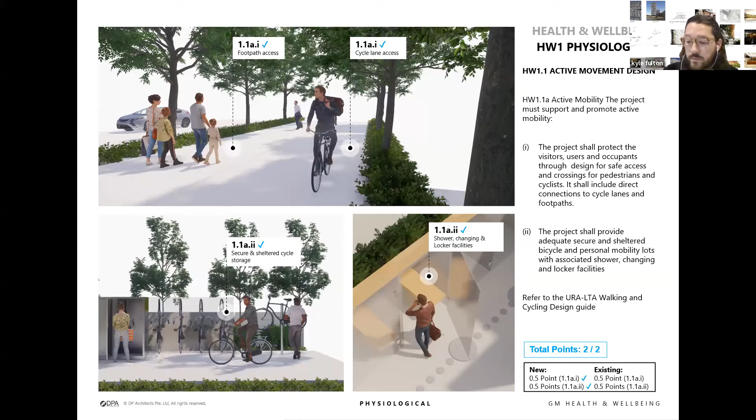The next item is about active interiors. So we come inside the building now, and here, if you provide active staircases rather than using lifts or travelators, this can be really beneficial, and so you get a single point for that.

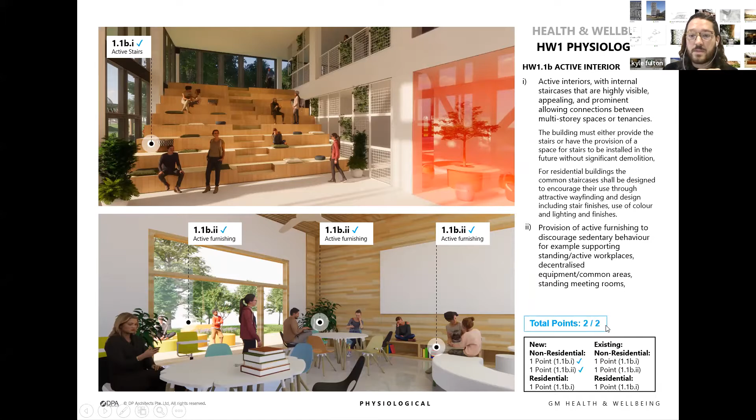Whenever you're in the rooms themselves, we talk about active furnishing. This is obviously easier to do in an office or a school-like setting because you might have a seated desk, a standing desk, or a group sitting setting for discussion - this could be a few couches in the corner of a room. And so if you provide active furnishing and staircases, you can gain up to 2 points for active interiors.

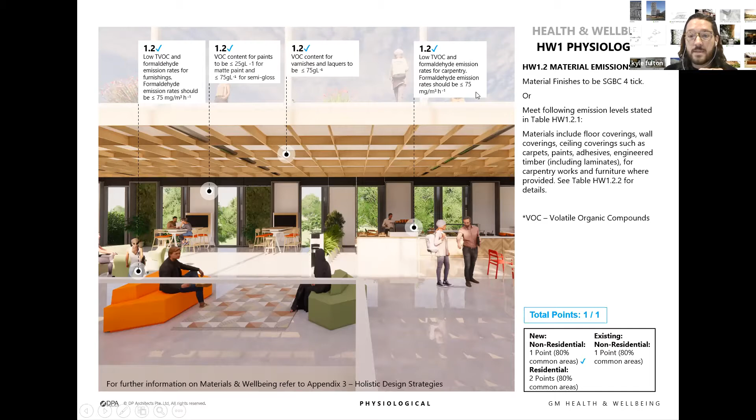The next item is on material emissions, and the idea here is that we try to keep volatile organic compounds as low as possible. Inside the health and wellbeing badge, there are tables that give you lists of how many volatile organic compounds can be emitted, and so this spec will be in your material sheets. So here we look at low VOCs for our furnishings, low VOCs for our wall coverings and our lacquers, and even down to our built-in carpentry. So if you meet the requirements needed, you can get 1 point for this.

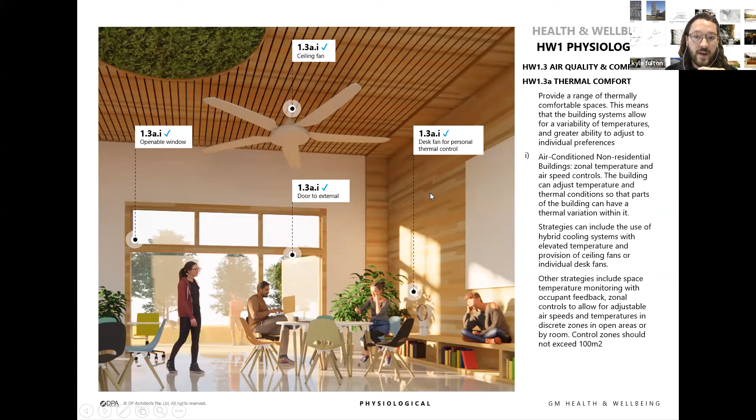The next element is about air quality and comfort, and also thermal control. So here it's really about having personal control over your environment. So if there is a window that you can open within your space, or even a door, that's beneficial. A ceiling fan that can be turned on those extra hot days, and even desk fans for even more personal control.

You can also gain points for having effective cross ventilation. Now, I know in a lot of our larger buildings, offices, schools, this isn't always possible - we quite often have double loaded corridors. But if you are able to get effective cross ventilation, then you can gain points for this also.

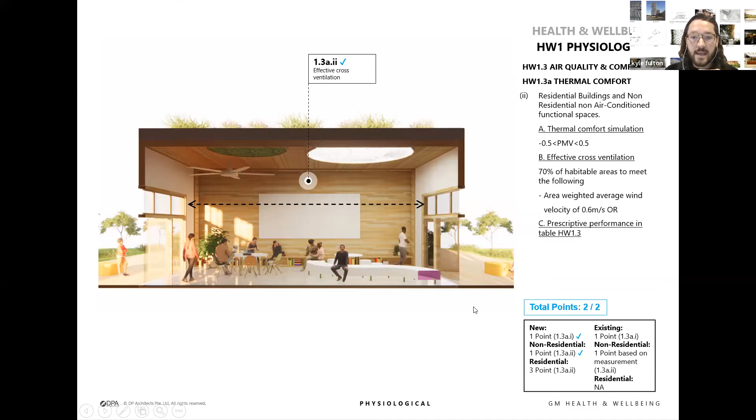Another point on our air quality and fresh air provision is about air purging systems. If you're able to purge the air of high CO2 levels, this can be beneficial for our overall sense of well-being, our health, and even our concentration levels in buildings such as schools and offices. You can also bring in an IAQ auditor who can look at the quality of the air.

For air quality, comfort, and fresh air provision, there's about 4.5 points available. This is quite an involved section.

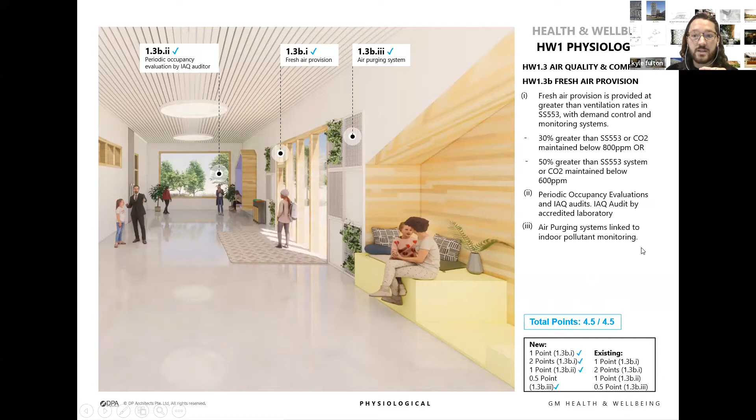Now we move on to psychological, which is about our mental well-being. One of the main points here is access to nature. There are about 3 points for this, and they give you a number of different ways to gain these points.

One would be having accessible planted courtyards. Another might be accessible planted sky terraces. And then moving inside the building, you can have fixed indoor planting. This refers to things such as green walls, inbuilt structures which can't just be shifted out should they start to look a little brown, rather than, say, pot plants.

And lastly, even a view onto nature can be really beneficial. If any of your classrooms, offices, or residential spaces had a view out onto trees or greenery, that can be really beneficial for your mental well-being.

Now we're looking at circadian rhythms. This is a really important point in Justin's project looking at their house, but it's also really important in offices and schools. One of the most important things is to have a link to circadian rhythms through natural light.

Large windows let you see the changing light conditions outside. To supplement that, we have main building lighting which follows circadian rhythms - warmer in the mornings and evenings, brighter towards the center of the day - and even circadian task lighting. This helps you be more in tune with nature, and it's said to improve the quality of your sleep, which we all know is important for everyday functioning.

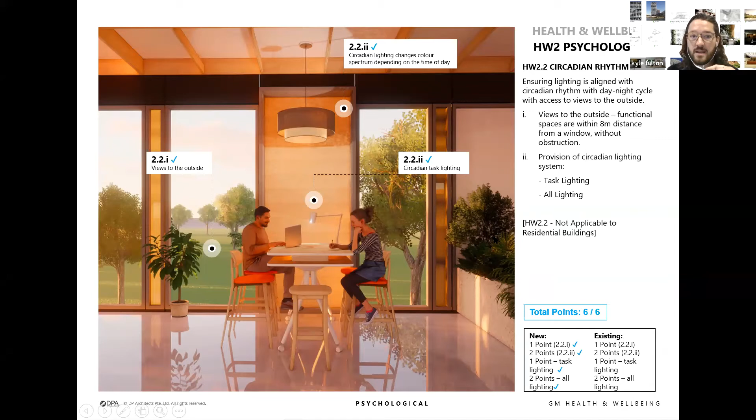The next point is on sound and soundscape design. From a space planning point of view, it's important to consider sound and where we place sensitive spaces. For example, in our imagined school, our classrooms are places where we have to think and concentrate, so if we're able to orientate those rooms away from noisy external sources, such as large roads, that would be beneficial.

If that's not possible, if we're on a very tight site, as they often are in Singapore, what we try to do is provide sound barriers. These can be natural, using trees, hedgerows, and bushes, or we can employ more architectural features such as walls and fences.

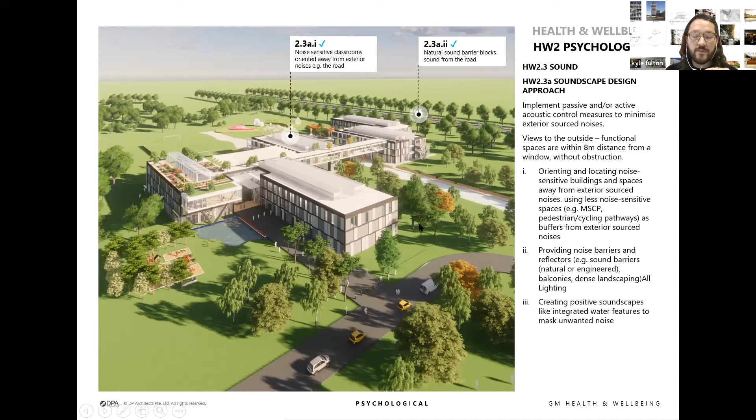When we move inside our building, sound also plays an important role, especially in large spaces with a lot of through traffic and people moving about and talking, such as your main atrium or lobby. These tend to be quite grand spaces with high ceilings and not a lot of furnishing, so there's a lot of echo and noise, which can be uncomfortable even if you're just passing through, but more so for support staff potentially on your front desks.

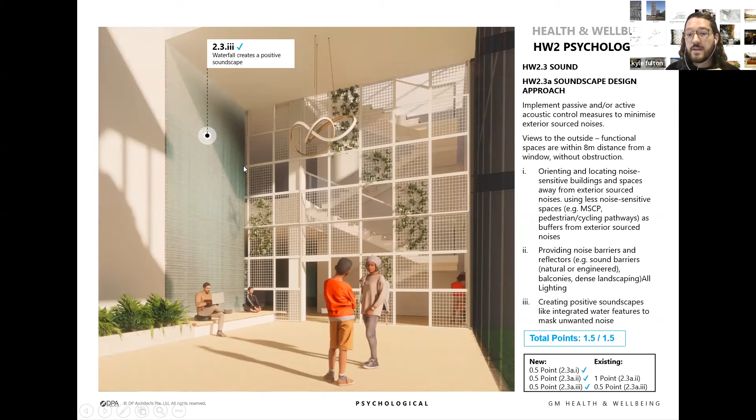It sounds counterintuitive, but we can add additional sound to that space, such as a waterfall, which creates a positive soundscape - background noise that helps drown out some of the more jarring sounds. It wouldn't have to be as large as a waterfall; it could just be a small water feature in the corner of the room. For this item, there are 1.5 points that can be gained.

When we come inside our smaller rooms, taking a school as our example, this is a typical classroom, and there are a number of ways we can dampen extraneous sounds such as echoes and clattering. The first is using carpeting on our floors rather than a hard floor, which will dampen footfall sounds.

We can use cork or acoustic panel material on our walls, because they will also help absorb sound, and the same goes for our ceiling - we can use timber baffles or even soft materials and green materials. Again, there's 1.5 points for this item.

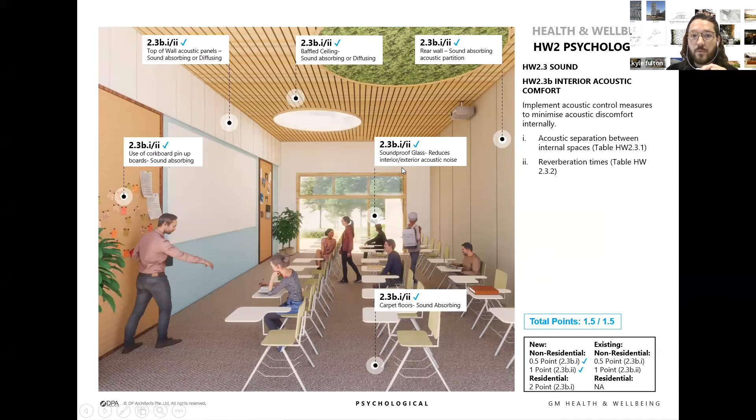We move on now to sociological, which is about our social well-being. The first part is about being inclusive. Now, BCA already have their universal design mark, which covers inclusivity in a very detailed manner. So rather than recovering it here within green mark, they say that you can have 2 points if you meet

gold or gold plus universal design mark. Another thing which you can do to gain a further 2 points is to include communal spaces or restorative spaces within your building. So if you had a room which could be multifunctional, this could be perfect. Inside here, you could do things such as yoga or group meditation, and this would garner you 1 point for the sociological part.

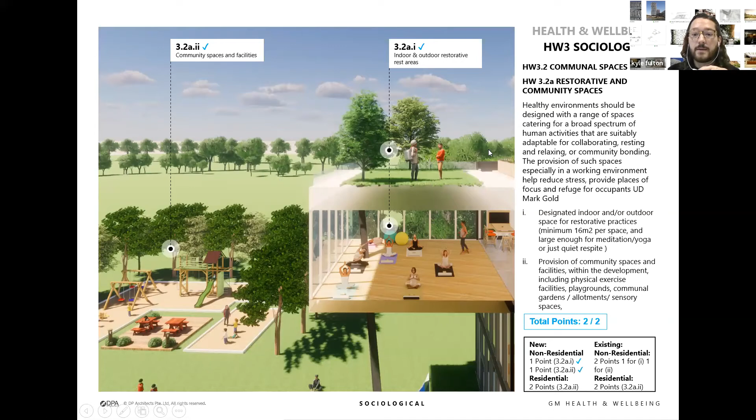Moving on, these communal spaces are not just for those who are simply visitors to your building or the main customer of your building. It's also for the people who work there. After all, they are the ones that will be spending the most time within this space. So here we want to create a comfortable space for the people who work in the building.

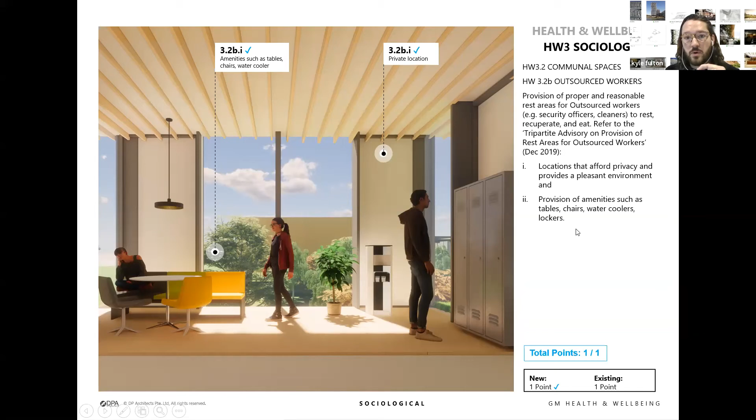So this is an example here. We've got somewhere comfortable to sit. We've got good lighting. We've got views to the exterior. We have amenities such as a water cooler and lockers in order to store your belongings whilst you're working. So if you do all of this, you can gain 1 point.

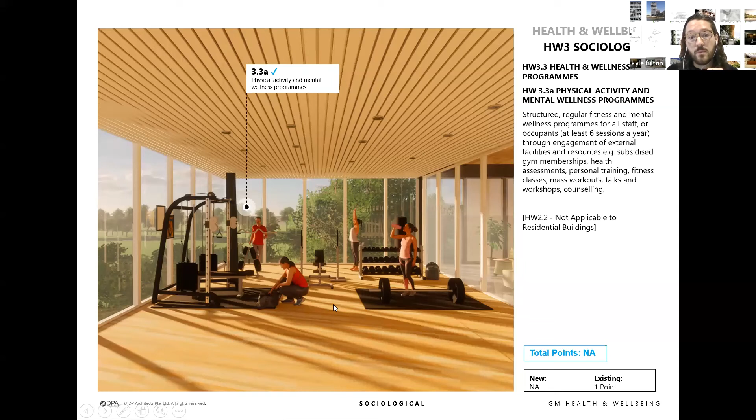As I mentioned before, we want to promote physical activity and mental wellness. And part of that is about being physical. Now here in this example, we've showed a gym, but again, it doesn't need to be. It could be a space for doing yoga. It could be a space for doing aerobics, anything that really gets your heart pumping a little bit. And if it can be done in a communal setting with your friends, with your colleagues, then even better.

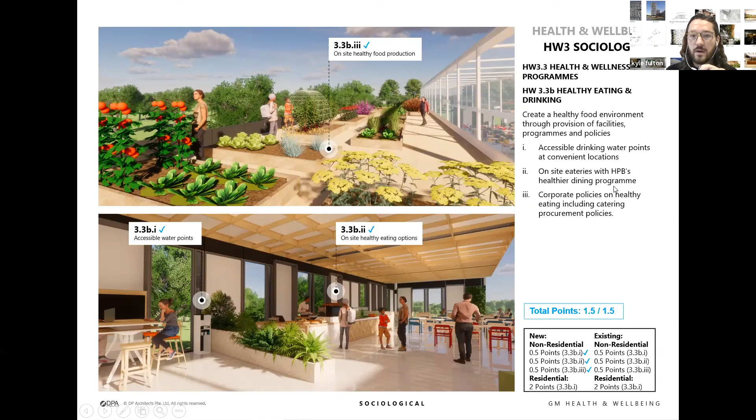Above, going the extra mile, we've included a kitchen garden. So it would be possible to actually grow organic, healthy vegetables and have them served within the canteen of your building. And if you do things like this, you could gain up to 1.5 points. So the last section is on innovation.

Now, they don't prescribe anything in detail for innovation, but obviously it must be innovative and it must help health and well-being. So the first example that we've thought of is about including measuring and monitoring systems within our building. So this would show us how much energy we're using, or rather how much we're saving and producing. And so we can feel better that our building and our activities within that building are not adding to the global climate crisis.

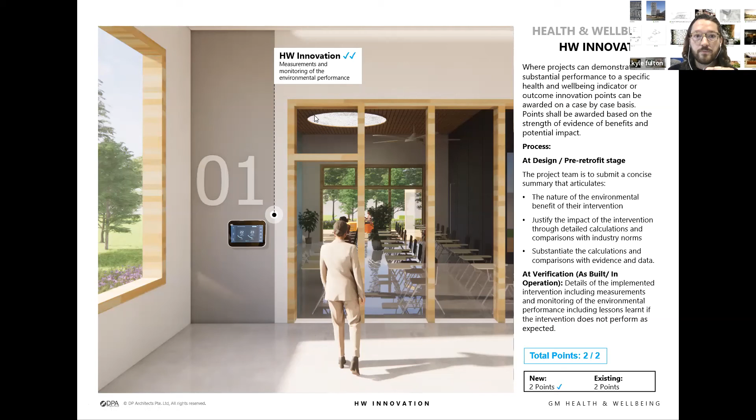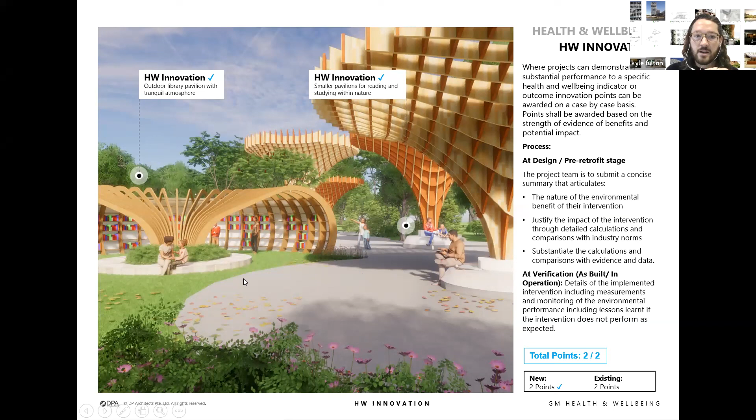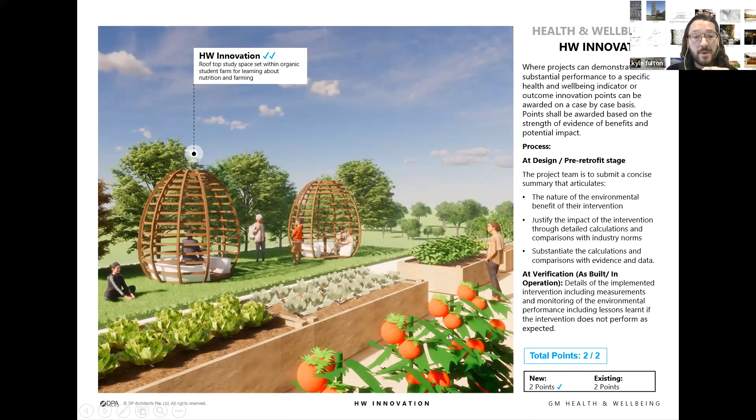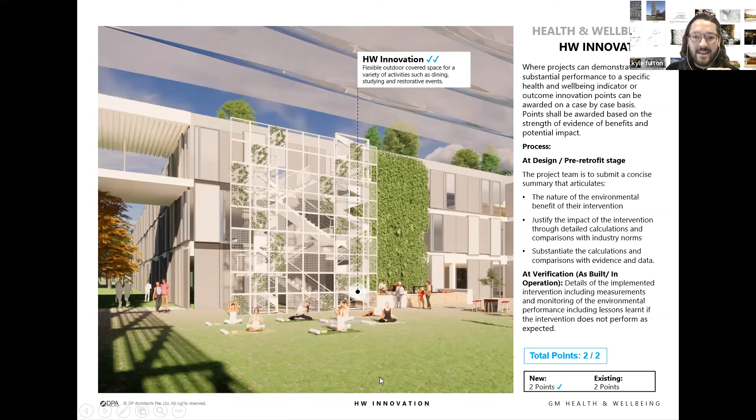Lastly, we're showing workspaces within the kitchen garden. So again, it's about being outdoors and have these interesting flexible working spaces. And this could also be done in a courtyard. I think what we're showing here is the rain screen cover at the top here, ensuring that it could be used 365 days a year, even during Singapore's inclement weather. You could still get out and enjoy yourself in the fresh air.

So that's the end of the health and well-being portion. I have a final slide here, which I believe Kailas would like to go on to describe a little. Do you want to share yourself, Kailas, or should I stop sharing?

I'll let you continue, Kyle. Thanks, that was a really interesting presentation. Okay, thanks for that. I noticed you scored full marks for all the points, so well done on that. Well, yeah, thank you very much.